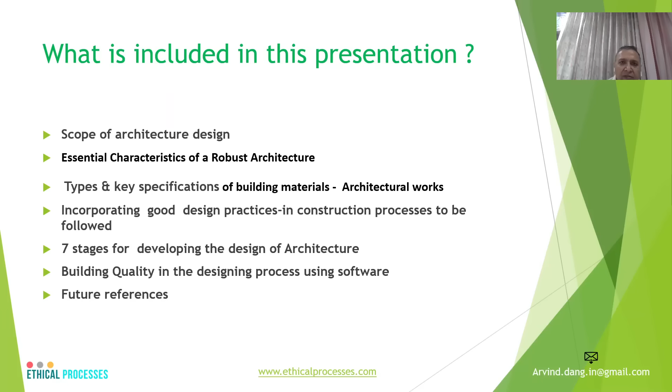Now, in my presentation, primarily it includes the scope of the architecture for the residential buildings, for the commercial, shopping malls, offices, education institutes, hotels, hospitals, factories, and other engineering works.

What are the good characteristics of a robust architecture? First of all, it must be pretty elegant. It must make optimum use of the permitted FAR. It must meet the required specifications prescribed in the NBC, National Building Code, including health and safety. The plans and elevations must be easily visualizable and as per the requirement of the stakeholders.

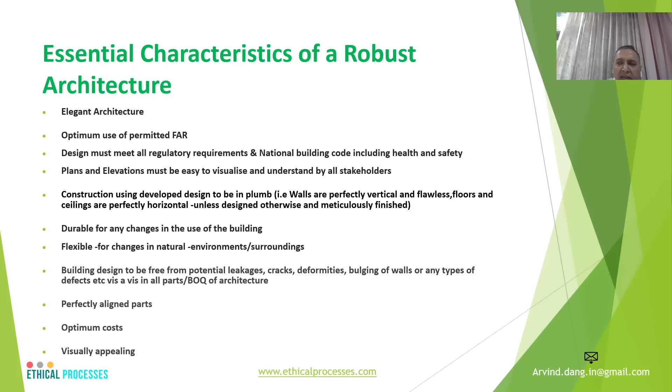The plumb must be perfect. The changes, if any required, must be able to be made in the end use of the building. It should be able to accommodate and take care of any changes in the natural environments in which the building is located, and the building should be free from leakages, cracks, deformities, bulging of the walls, and other kinds of defects, and all parts must be aligned. Project cost must be optimum, and of course it must be visually appealing.

Now, the first component in the designing, while the designers work on the plan and elevations and other aspects of the building, is what kind of materials are going to be used in the designing. So, for example, stones, bricks, structures, steel, etc.

Now, let's start with stones and marbles. The designer has to be very clear in specifying clearly what kind of sizes, thicknesses, color of the marbles which are going to be used, which country, polishability, strength, and other properties like thickness.

For the bricks, the designer has to specify clearly what percentage of moisture content has to be there, the shape, the sizes, the compression strength, and the density.

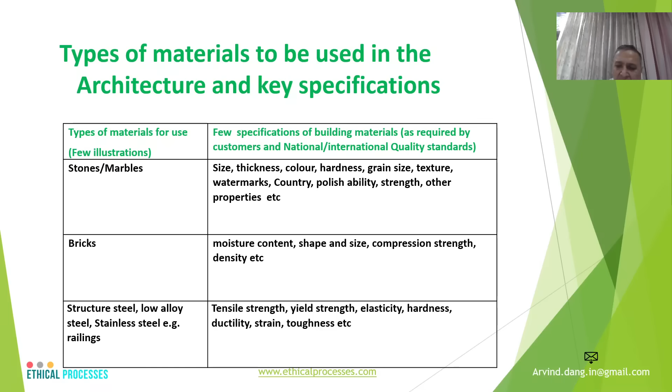In case of structure steel, which is required for example for the railings etc., the designer has to specify the tensile strength, yield strength, elasticity, hardness, and toughness.

Then there is aluminium, which is primarily used in the case of facade or other components. Designer has to specify what grade of aluminum in terms of strength to weight ratios, air tightness, corrosion resistance, and appearances. For the glass, for example for the doors or for the facade, what color, shapes, transparency, brittleness, hardness - the designer has to specify that.

In case these details are not possible, then one has to specify the particular model and make of glass to be produced, the kind of ceramics, meaning chinaware, porcelain, etc., what hardness, modulus, elasticity, ductility, wear resistance. There are different standards which are comprehensive enough to include all these details. So the designer has to specify these.

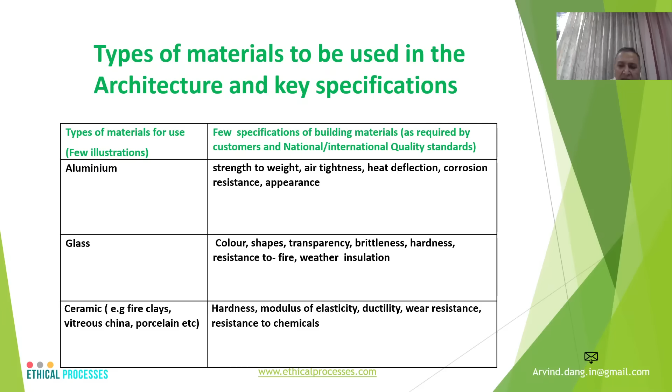For the POP, what color, compression strength, coarse particles, setting time. For the paints, what gloss, viscosity, flowability, workability, etc., although these paints are more covered in the interior designing presentation.

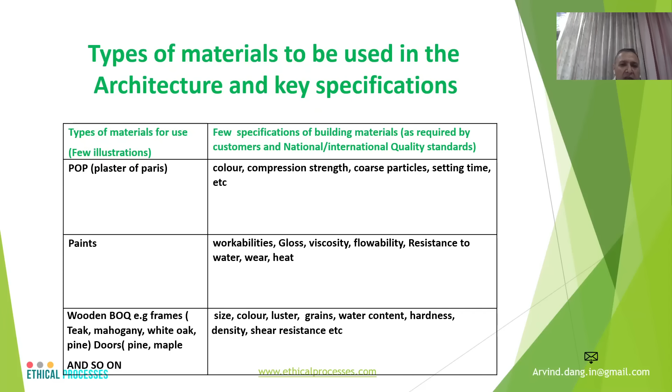Then for the doors, in case these are made out of wood, what kind of wood is to be used - mahogany, teak, white oak, pine, or maple, etc. What sizes of the doors, the colors, the luster, the grains, water content, hardness, density, etc. - these have to be specified.

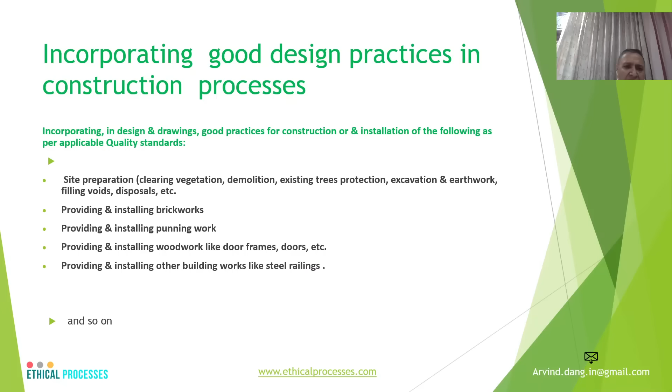Now, what are the good design practices in the construction process which the designer has to specify in the case of architecture? First is starting with the site preparation - how the site is to be prepared, particularly when it is barren land, in terms of clearing the vegetation, the process of demolition, protecting existing trees, particularly in stringent environments. How to carry out the earthwork, how to do the brickwork, what punning process to follow, how to provide and install the woodwork like doors or frames, and installation of the steel railing, etc.

The next most important point is that the design must be able to build quality into the designing process itself, so that ultimately the construction which is done follows the quality built in the designing.

This requires that the designer makes use of good surface modeling, mesh modeling process, 3D navigations, and various visual styles in the architecture, developing drawings, image references, integration of the architecture design aligned to the interior design and MEP services. There are different kinds of software used, and AutoCAD is one of the most popular,

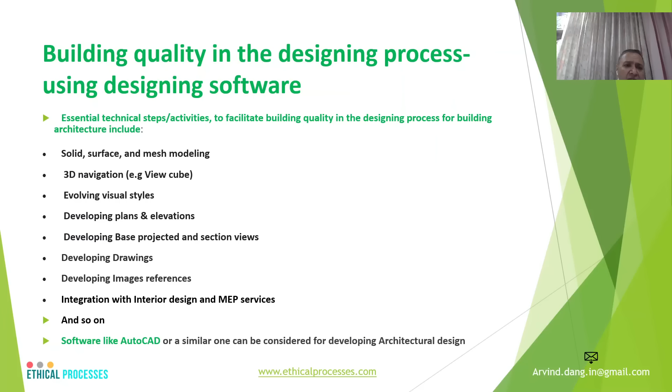which is used by designers to develop plans, elevations and designs. Now, how to ensure that the designing process is comprehensive, based on various perspectives and the features required. For example, how to create and edit architectural designs, structural engineering designs, MEP views of coordinated drawings, get the designs and layouts of the project before construction for general contractors, subcontractors and owners to review these,

and be able to schedule and phase BIM modeling information into the design for the purpose of ensuring there are no errors, drawing designs are free from any omissions, cost estimations are done properly and comprehensively, and there is better comprehensive collaboration among the various designers.

The system design should be able to produce drawings out of the software used by these designers, and should be able to incorporate annotations and notes with various kinds of elements. One popular software put to use is Revit architecture, which can be considered as an alternate.

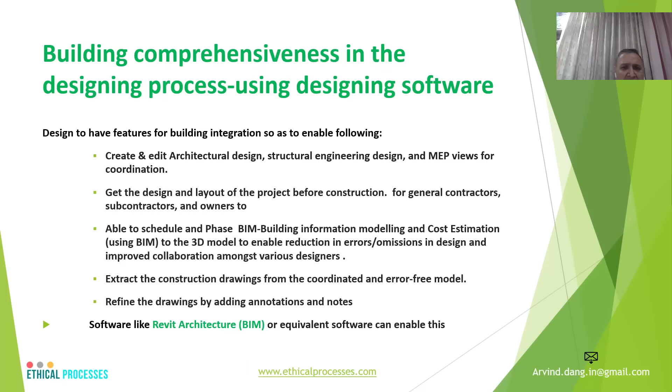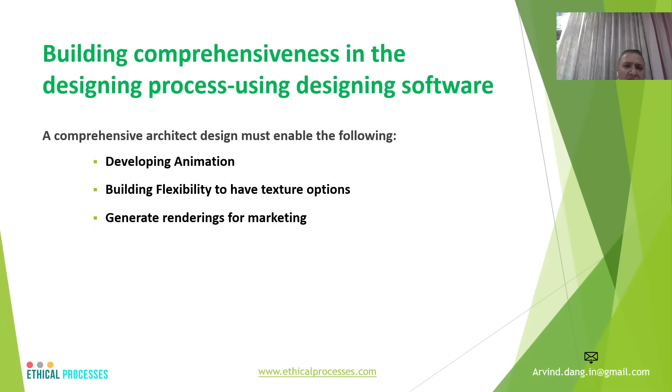Then of course the comprehensiveness must ensure that the designer is able to develop animations and building flexibility with different texture options, and generate rendering for marketing, particularly important in the context of the sale of residential projects.

Now there are different stages, like in structure, for developing a design of the architecture. Obviously it has to ensure that the design is robust in terms of statutory and safety requirements, incorporates all the national and international quality standards, optimizes the project cost, and

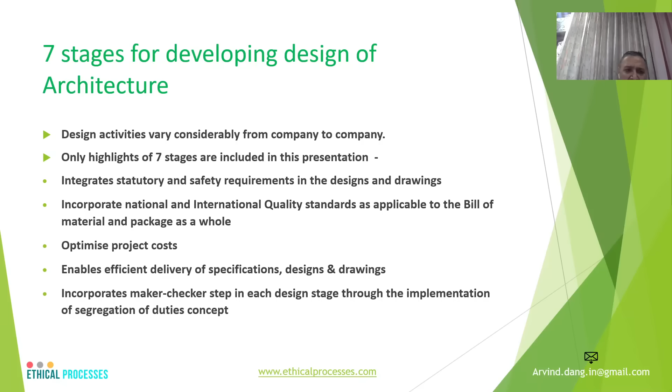enables efficient delivery of the designs and drawings, which is one of the most severe bottlenecks in today's context, and building in the maker-checker concept, so that there are no issues of segregation of duties.

Now stage one: the developing of the concept designs. As mentioned earlier, I'm not getting into the details of how to do these concept designs, but talking about the various precautions to be taken so that there are no issues in terms of developing a robust design.

Activities that can adversely impact the business include skipping or compromising on important design and drawing aspects vis-a-vis the statutory code requirements, and compromising on features like tolerances on the specification of material workmanship.

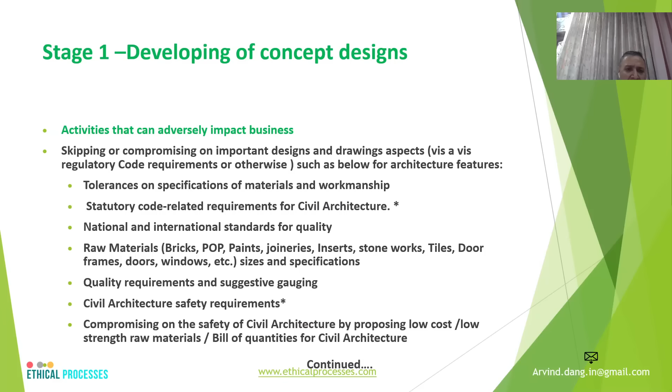The statutory codes and national and international standards are not incorporated, raw material sizes and specifications are not properly mentioned, quality requirements and suggested gaugings need to be incorporated, and safety requirements are inbuilt. There should be no compromise on the safety of the architecture by proposing low cost or low strength materials and bill of quantities.

Other things that can happen in architecture include some kind of arrangement between the architect and the approving agencies in terms of issuing FAR sanction and other compliances vis-a-vis sanction drawings, and not obtaining necessary inputs for strategic plans vis-a-vis vision, landscape, traffic circulation, master plans, area plans, preliminary plans, elevations, etc., which can cause lots of problems and inconvenience to end users of the building,

and not assigning competent designers, or using the same designer to carry out the various stages of this design, and using unlicensed software which have very inadequate features.

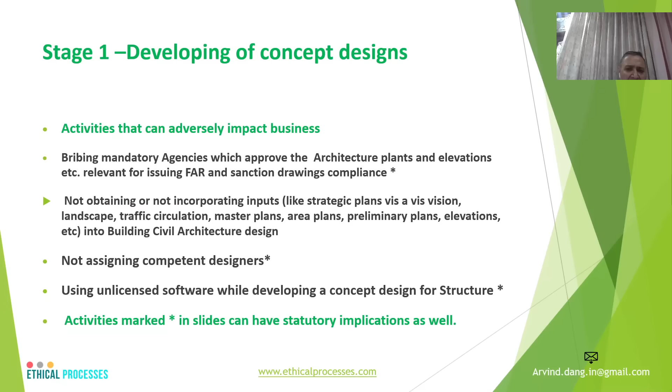Now, developing of the schematic design. This includes preventing those activities where the design intents are not aligned to the approved concept designs, and schematic drawings are not comprehensive.

The area statements which are required to be filed are not complete in terms of the details of each and every part of the project. The cost estimations are based on ballpark estimates and thumb rules, and detailed assumptions are not stated clearly.

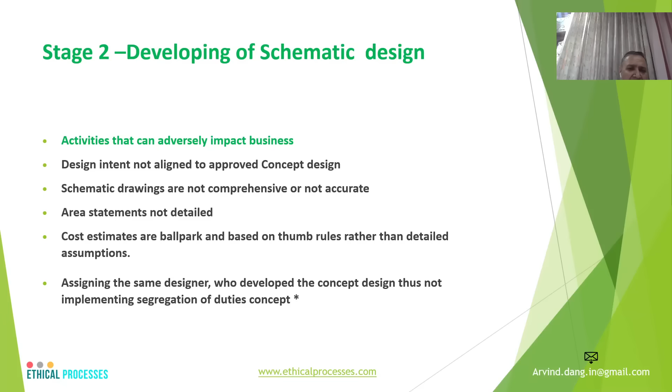The implementation of this schematic design is done by the same people who have done the concept design, causing problems related to the segregation of duties.

In stage 3, which is obtaining sanctioning of the drawings, at times the big organizations also outsource this to what is called a code consultant. Various kinds of coordinated drawings and specifications are required to be provided to the approving agencies for the architecture, for the facade, for the landscape, etc.

Here, in case the design is not appropriate, it can lead to a lot of problems related to incorrect area statements vis-a-vis the intended construction plans, and obtaining these approvals through unfair means like bribing of these officials.

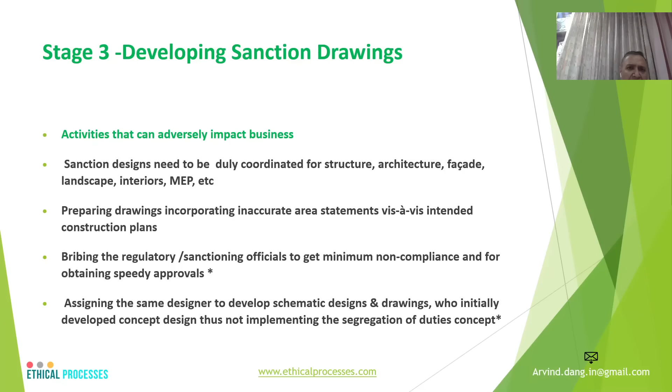And again, here also the sanction drawing is being prepared by the same people who have prepared the schematic design instead of assigning it to some code specialist.

Next is revising the detailed drawings based on the sanction approval, because it is not that whatever we have submitted to the approving authorities, they are going to approve it as it is. So once this approval has come in principle, detailed drawings need to be drawn in stage 4, aligned to these sanction drawings.

Here there can be some collusion of the main architect with the sanctioning authorities in return of some favors.

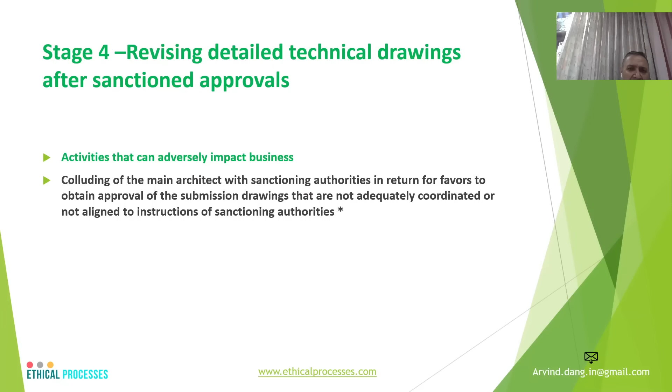Next stage is the developing of the tenders. Tenders in the case of architecture broadly include structure and architecture, external development work, facade, and landscape. In my subsequent presentation I will cover in more detail the external development work, facade and landscape separately, like I have already covered for the structure.

In the tenders for architecture especially, one has to ensure that the specifications and brand names, particularly of the various BOQ material which I mentioned earlier, are wide enough to offer a good range to the designers and the contract team to choose from, to avoid any exchange of kickbacks in the procurement of these materials.

Now, tender drawings must incorporate all the necessary quality parameters, quality standards, and inspection requirements not only for the BOQ but also for the fabrication and construction work which is to be completed. They must be comprehensive enough.

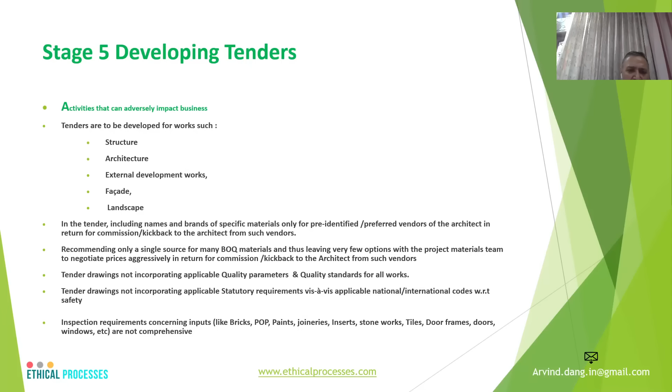Next is the making of cost estimates, the last but one stage, where project designers and architects play a very vital role in projecting the overall cost of the project, including the cost of structure, consumption of materials like bricks, POP, paints, stonework, tiles, door frames, aluminum, glasswork, etc. It has to be done on the first principle basis rather than on a thumb rule basis.

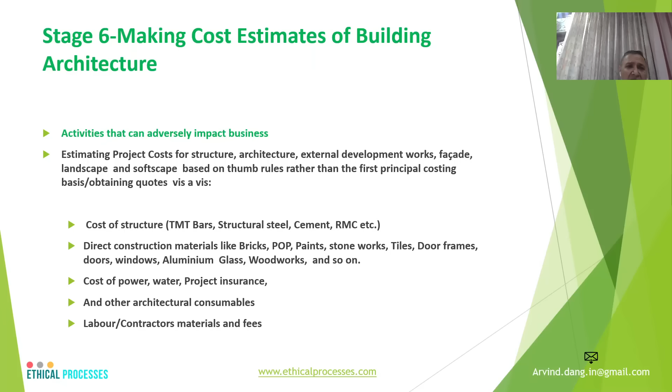Then cost of power and project insurance is another very important aspect which needs to be incorporated. Sometimes these architects will give an overall overview of these things, and there are separate teams doing the budgeting for the entire architecture, but architects provide the initial leads for arriving at the likely cost.

And the last stage is the developing of the working drawings and good-for-construction drawings, which need to be given to the building contractors who are going to erect the building in terms of civil works. These must be aligned to the FAR and the building plans and elevations, and there needs to be control for providing all this.

One has to ensure that subsequently architects play a very vital role in getting the occupation and completion certificate, and that these are obtained through fair means.

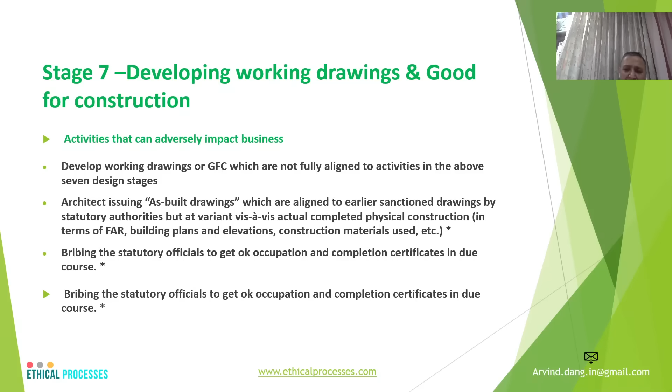Broadly, there are 25 activities which I have covered in my presentation. More details about this can be seen in my book, Ethics in Real Estate, chapter 1, and there is a blog specifically on architecture which you can refer to. Thank you very much.